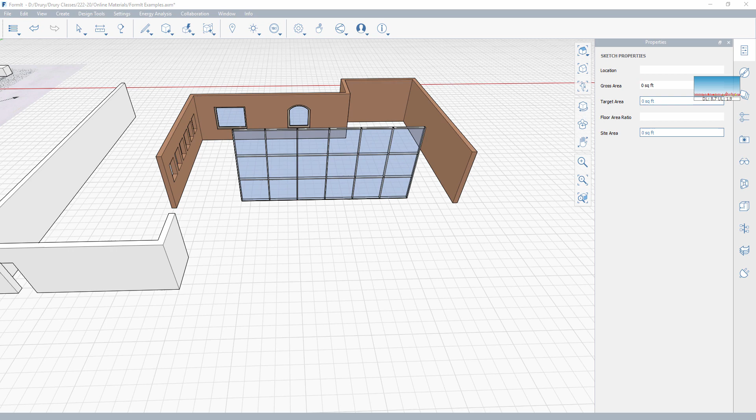This video is set up to help you do a quick curtain wall inside of FormIt. Now, there are multiple methods of getting this done. This is sort of a longhand or old school way of doing it.

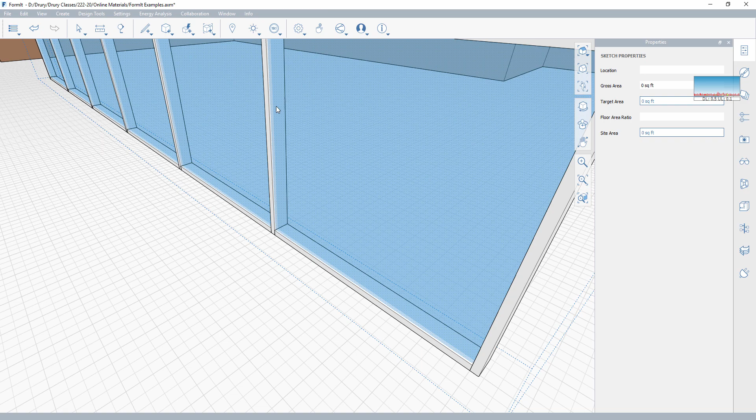And if you notice, it's not the most precise either. One of the things you can see is I don't have a line or an edge for the glass. The glass is essentially cutting through the mullions. So this isn't a super precise way to get it done, but it's fast and it works well. And so this is a method that I'll often use in terms of getting something put together.

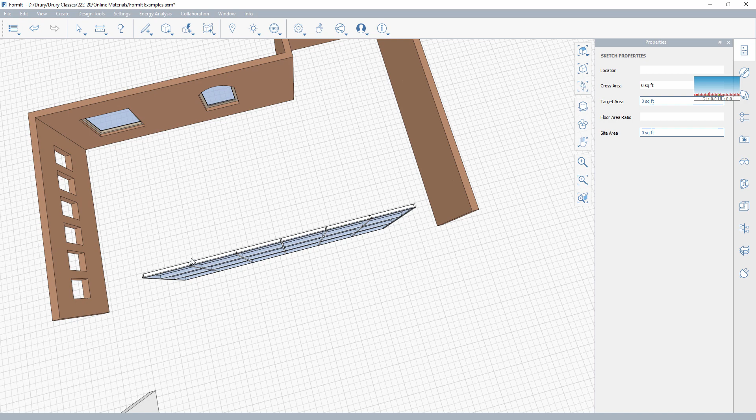So that said, let me go ahead and move this little demo piece out of the way here. Just a lasso around all that. Let's move it off to the side. So I'm going to set up this curtain wall to run from here to here.

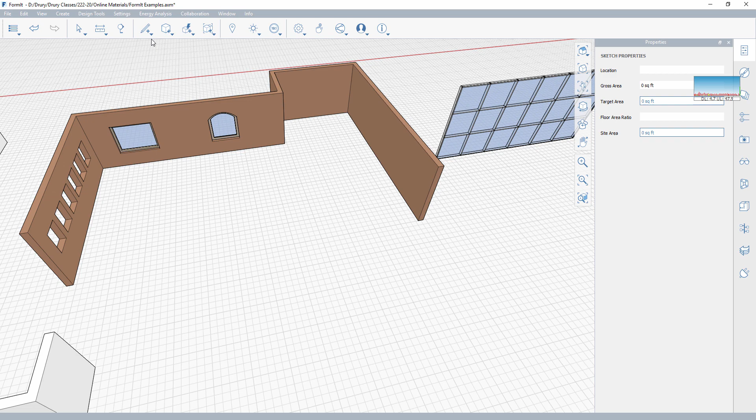So the first thing that I typically do is go ahead and put the glass in first, which sounds a little bit backwards. And again, it doesn't make the most precise model because it's not individual panes of glass. But a lot of times what I'm looking to do on something like this is speed, right? Revit is going to give me the opportunity to make something like this pretty accurately. Inside of FormIt, sometimes I'm simply looking to make this quick.

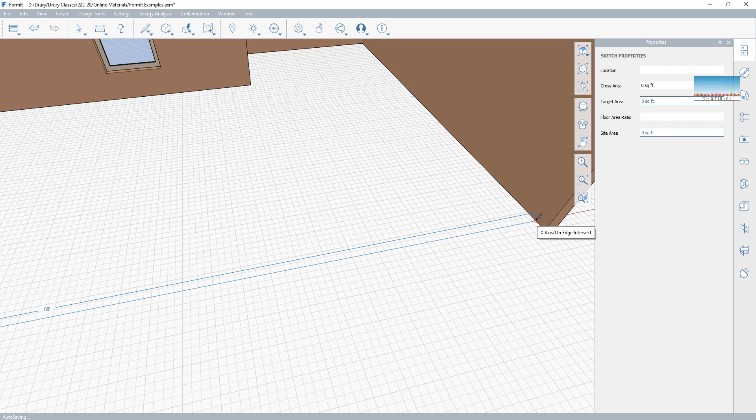So what I'm going to do is start by putting in the glazing. I'm running a long line across. I'm going to set that line up to be about 1 inch thick, thinking of that as a couple of panes of glass, not just a single thickness of glass, but something a little bit thicker. And we'll build that polygon.

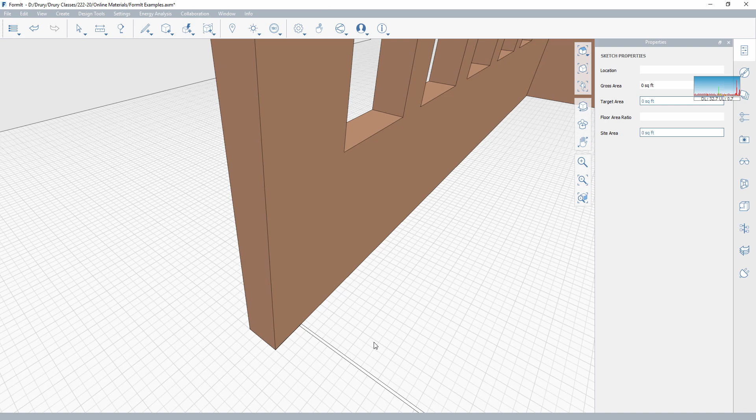I might want to remove, I should have a little extra edge right there. That was sort of my guide. Let's see if I can select that. Well, I'll probably leave it there. Let's try one more angle. Let's try this angle right here. There we go. That was my guide to set that glass in 1 foot back from the wall.

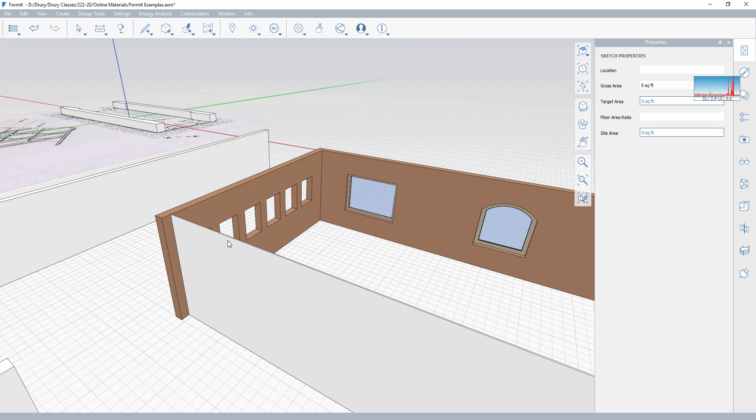So I'm going to select that and let's extrude it up to the top. Then I'm going to double select and apply my glass material. Cool. So I have essentially the glass running across.

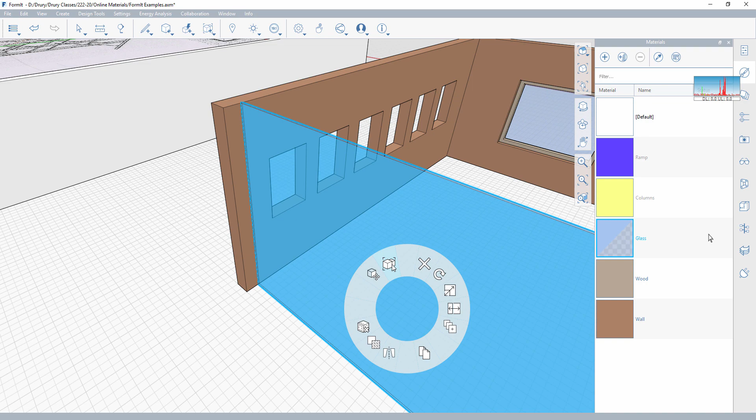So the next thing that I want to do is go ahead and start putting the mullions in. So to do that, the first thing I want to do is group my glass. So just run the group. I'll name this glass. And then I'm going to use my line tool to draw out my mullions.

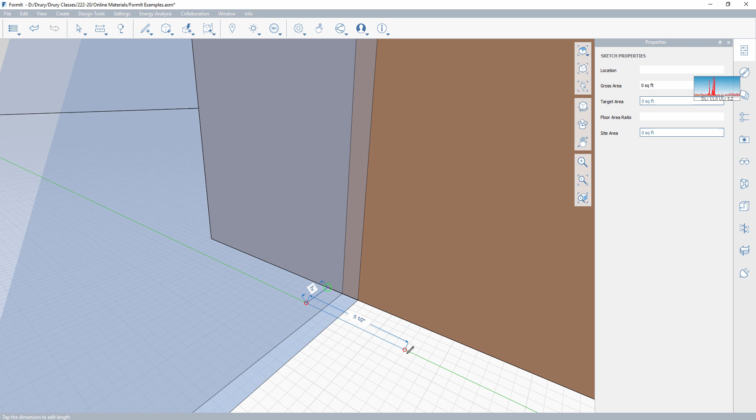Now again, typically the mullions go not as far to the outside of the glass as they go in. So I'm going to go about 1 inch out, 2 inches over. Then I'm going to swing to the inside of the glass to make sure it's not drawing on the surface of the glass. And we'll draw this 6 inches inside.

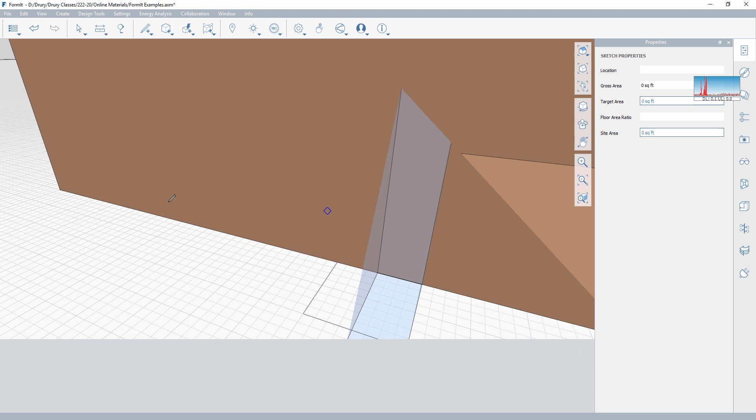And then I'm going to close that line out because I don't want this to be built with 2 lines right here. I'm going to go ahead and delete my guideline. And then I'm going to create a new line that closes this out. Again, I need to swing to the inside of my glass to start the line at the vertex endpoint of that line, and then to the other side of the glass to connect there.

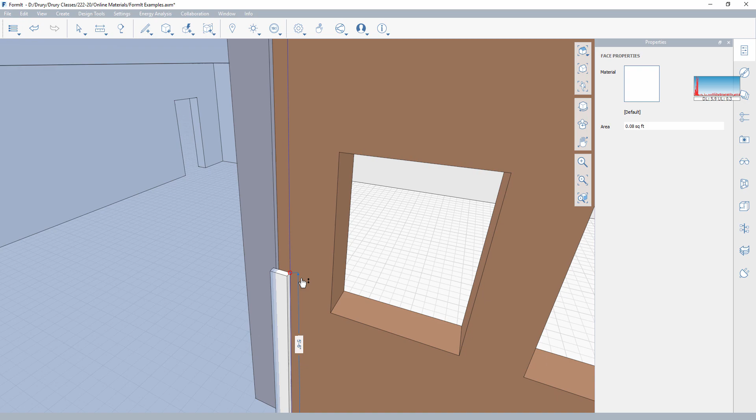Cool. So just need to sweep that up. So again, I'm going to rotate to the inside of the glass. It'll make that a little bit easier to select. Use my sweep tool and bring that up.

Blammo. Mullion 1. So I'm going to double click to select all of that. I'm going to group it to make it easier to click or to select mullion. Okay, and let's give it a good mullion color too.

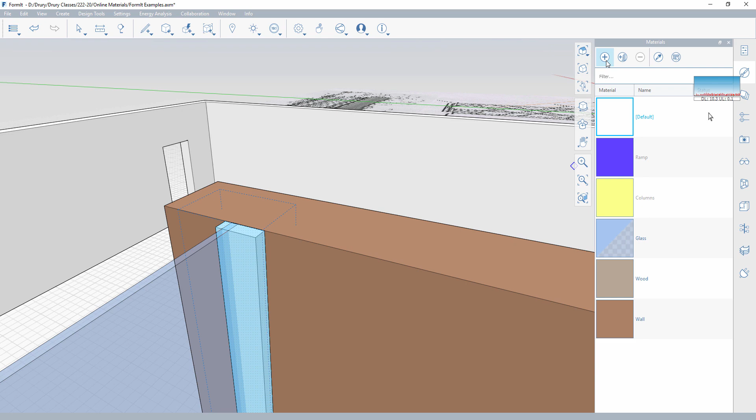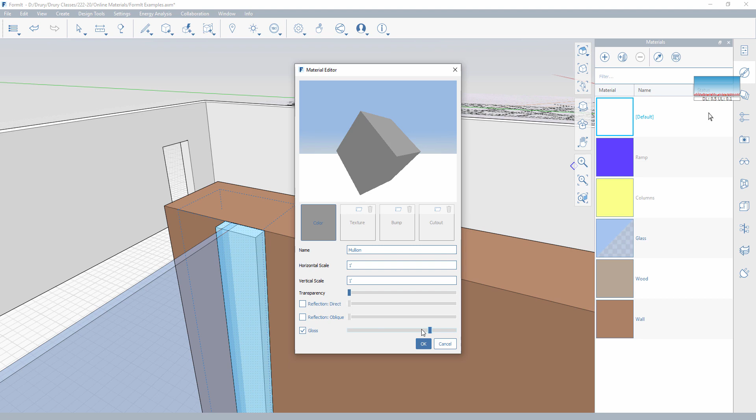So new material, mullion, and let's get it sort of a grayish color with a bit of gloss, so it's a little bit metallic in its appearance. Yeah, that'll work. Mullion, that, okay.

So once I have this, I'm going to be using the array tool essentially to stretch multiple mullions across. This is, if I remember right, it was very arbitrary when I set it up. It's about 59 feet. So let's do about 10 mullions across. That's going to create panels of glass that are about, well, yeah, they'll be about 6 feet apart then.

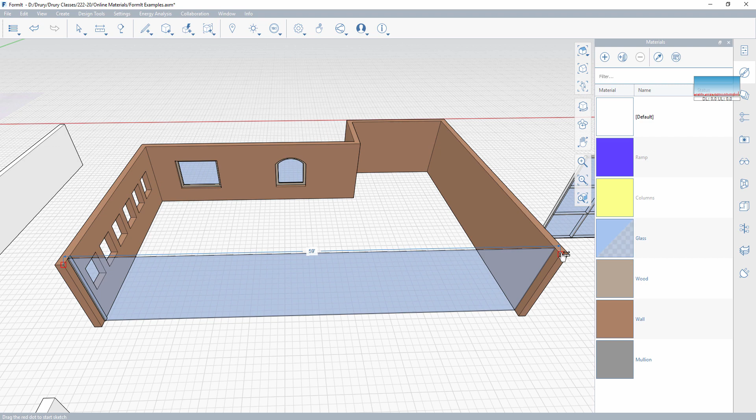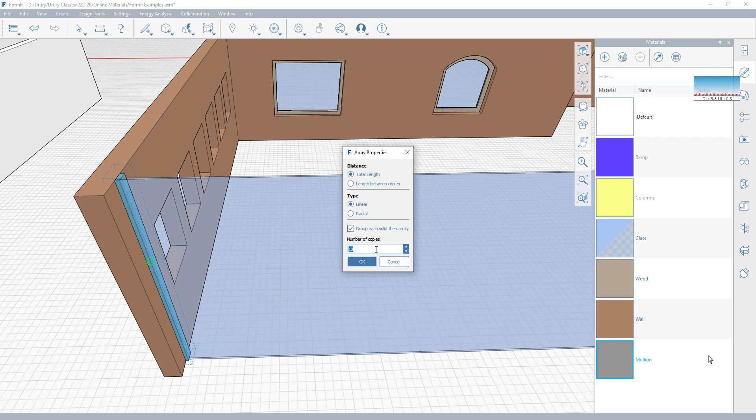Wide enough for a door and large enough to be feasible, or small enough to be feasible. So with that group selected, I'm going to right click and go to my array tool right here. I'm going to do a linear array. I'm going to do a group of 10, and I'm going to say OK, and I'm going to start by selecting this inside edge on vertex.

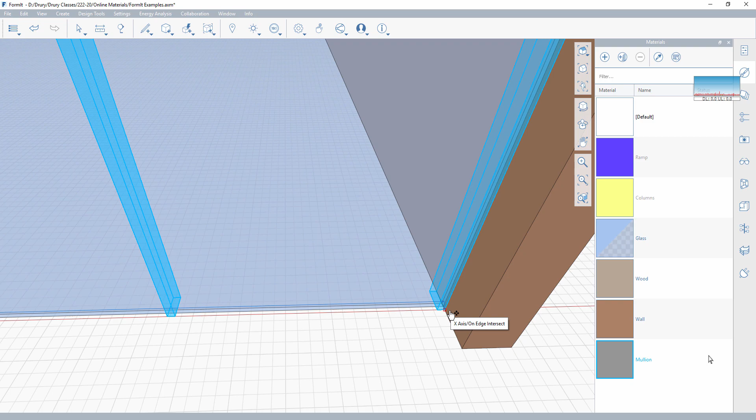And I'm going to place that inside edge on this wall, and I want to make sure it's locked onto my axis. So I've got my vertical divisions, or my horizontal divisions, excuse me.

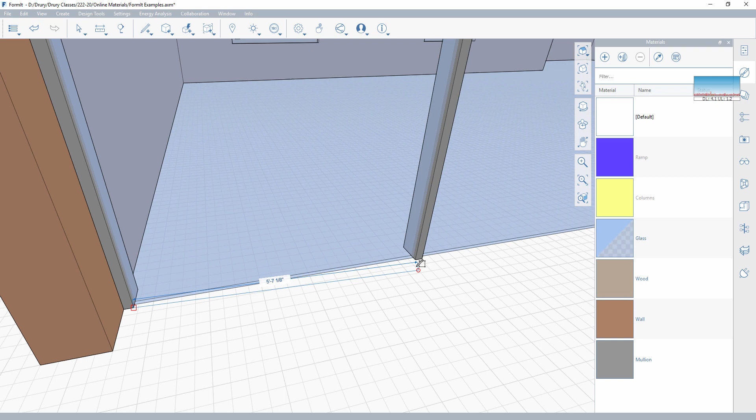So now I need to go ahead and put in my horizontal mullions. So to do that, I'm simply going to use my Create Rectangle tool. I'm going to go outside edge to outside edge, and then I'm going to flip around to the inside of the glass. Select this inside piece. Those mullions that I did were 2 inches thick, so I can go Tab, 2 inches.

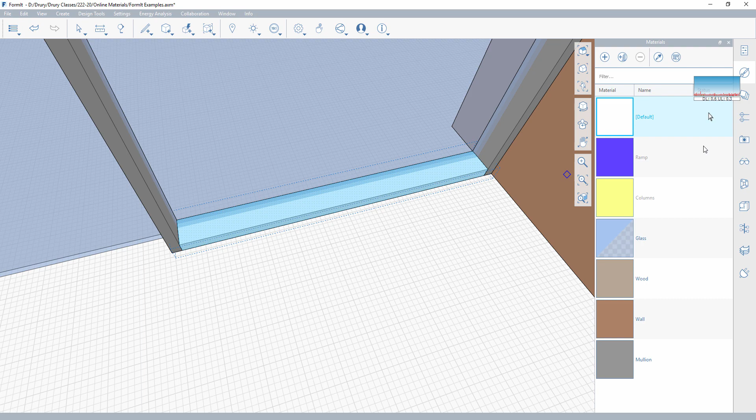Let's make that a component again. Or not a component, you can tell sort of a Revit brain, don't I? Mullion, material, mullion. All right, so that's ready to array vertically now.

So again, I'm going to select it. It's array, we don't need 10, let's do about 3. So again, I'm going to use the top edge this time. So top edge to top edge.

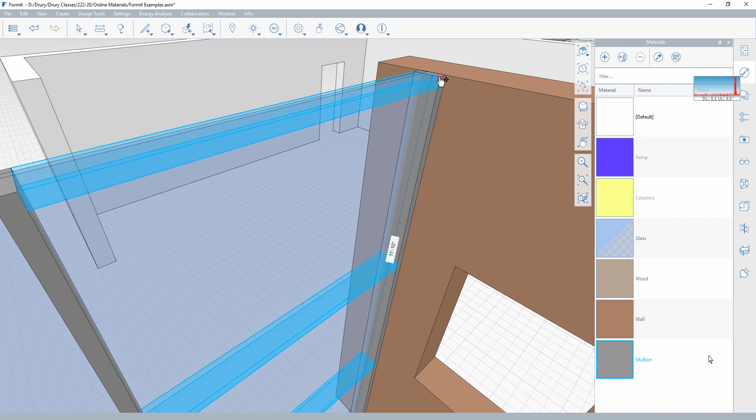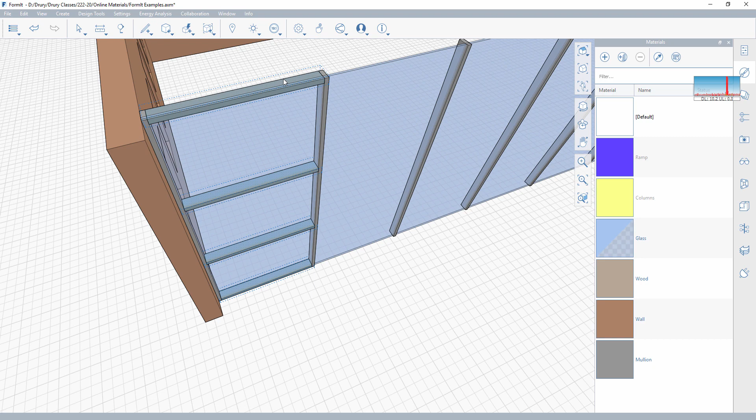And now with those still selected, they just deselected. Let's see here. Come on, work with me here. I'm going to use the tab button, and let's see if I can grab that group again. There we go. Right click, array, and this time we are back to a copy of 9 this time, because we will be 1 short.

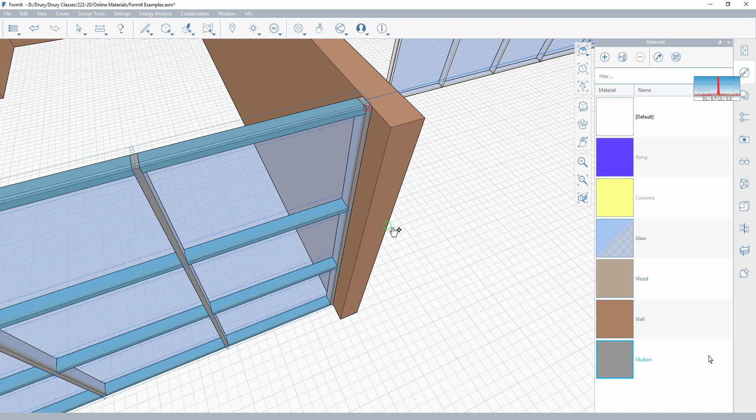Right there. And that creates that basic curtain wall grid. Now from there, I can certainly move those up or down. I can get them working sort of at a more individual mullion level, but that pretty quickly gets me a curtain wall put together.